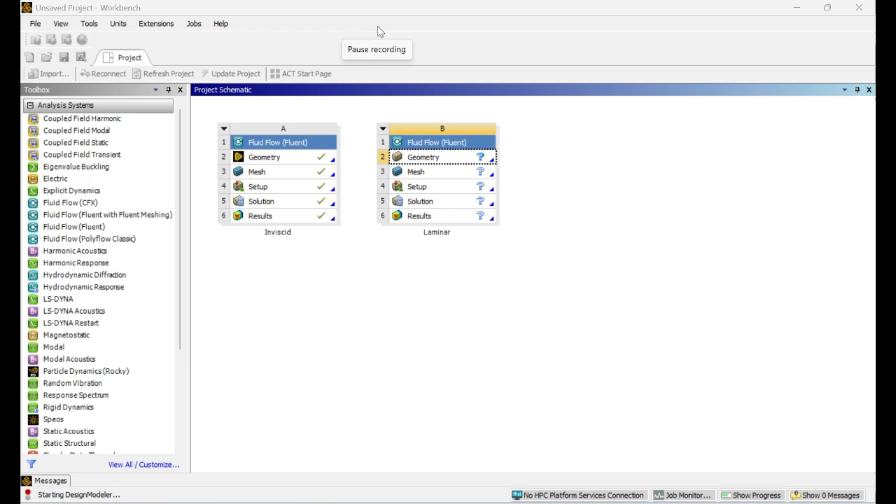Right-clicking on geometry, new DesignModeler. And similar to before, we're going to start sketching. Sketch a circle around the origin. Add some dimensions, in this case a diameter of 1 meter. Draw some lines along the horizontal axis.

Now we're just adding our dimensions. I'm going to change these to 25 meters each. Again, we're going to insert some lines perpendicular to the edges here. Add some dimensions to these, change them to 25 meters, because again, we're going for a rectangle that's 50 by 50 meters.

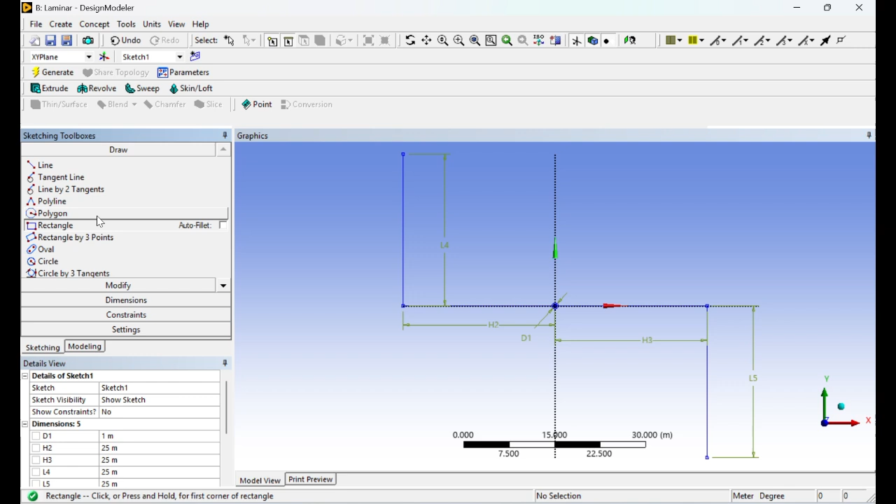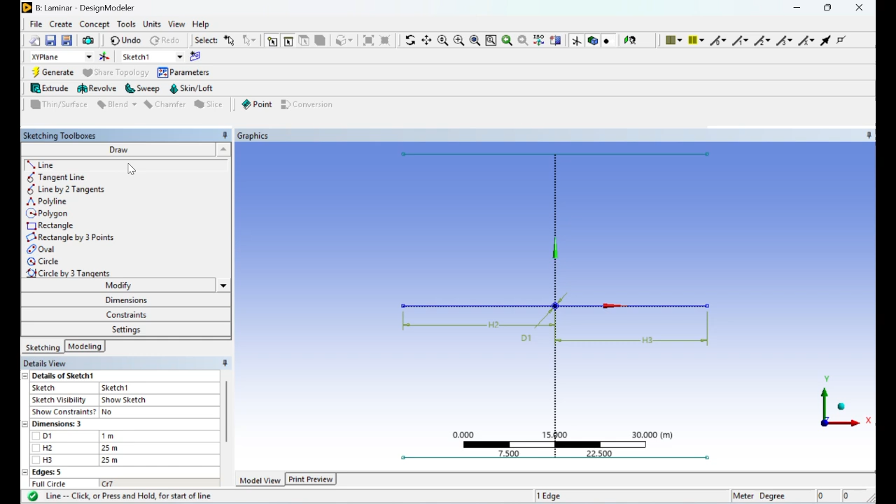Now we can input our rectangle. I'm just going to go in here and clean up some lines really quick. Bring this one back, and this one too. Just delete some of these dimensions and extra lines.

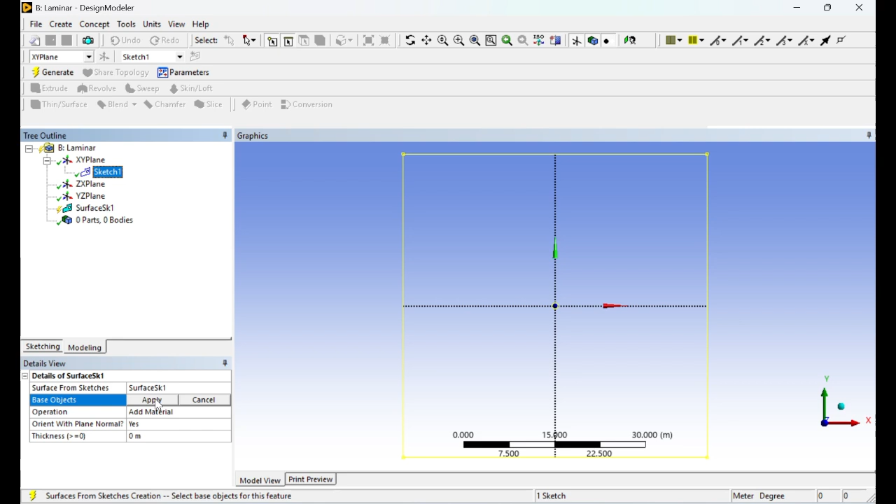And now we're going to go to concepts, surfaces from sketches, and apply. And hit generate, and we've created our sketch plane.

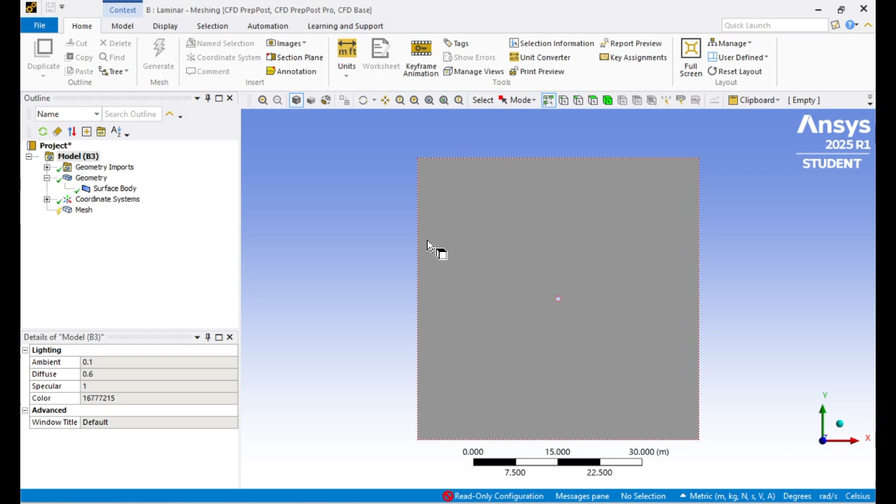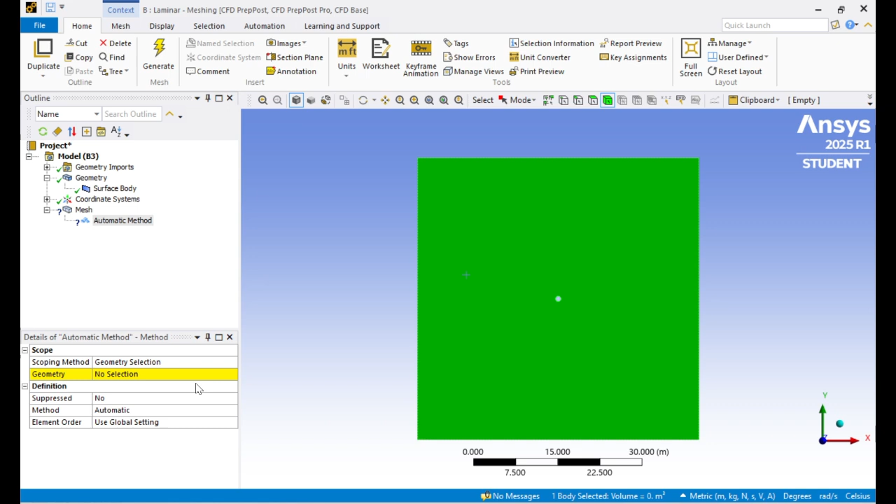All's looking good, so we're going to move on to mesh. Click on mesh. Insert, method, select the face, and then hit apply. I'm going to change this to triangles. Hit generate.

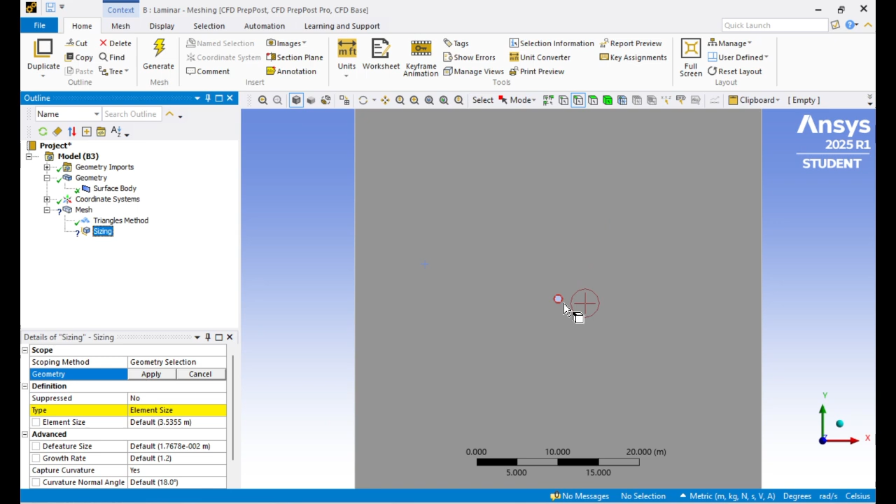And click on mesh, right click, insert, sizing. We're going to pick our edge select tool. Click on the edge of the circle. Change the number of divisions, change that to 250. Select no for capture curvature, and behavior to hard. And hit generate.

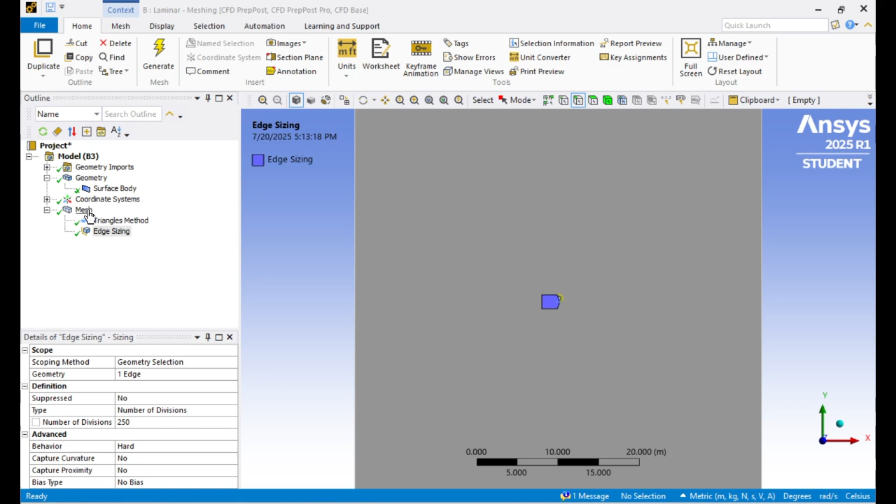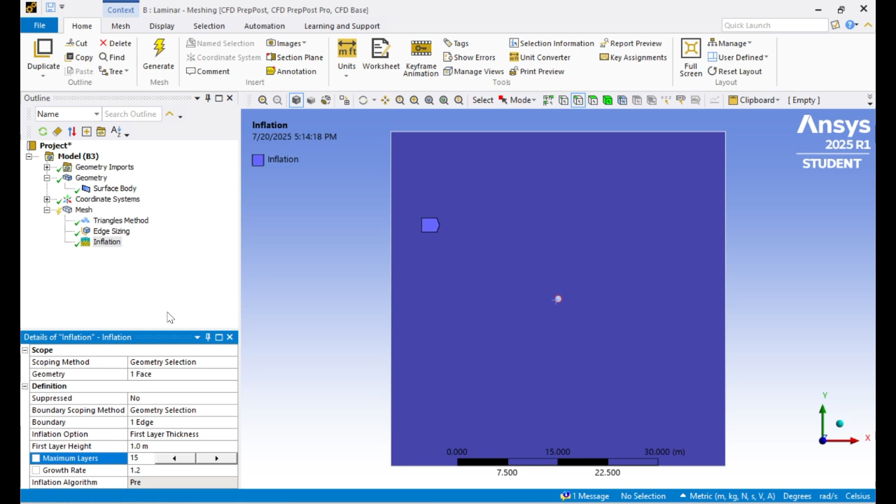And again, we're going to right click on mesh. This is looking pretty good so far. Right click on mesh, insert, and then inflation. First select the face, hit apply, and then select the edge of our circle, hit apply. Change this to first layer thickness, and define it by first layer height at 1, and our maximum layers at 15. And hit generate.

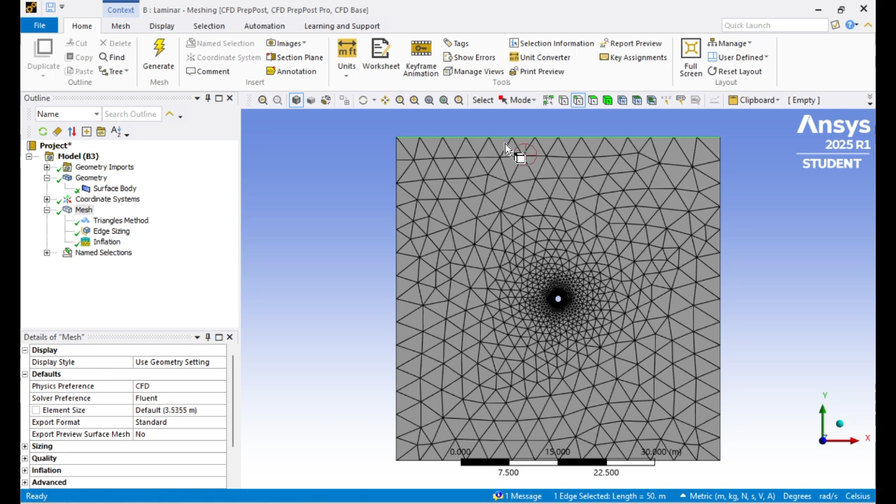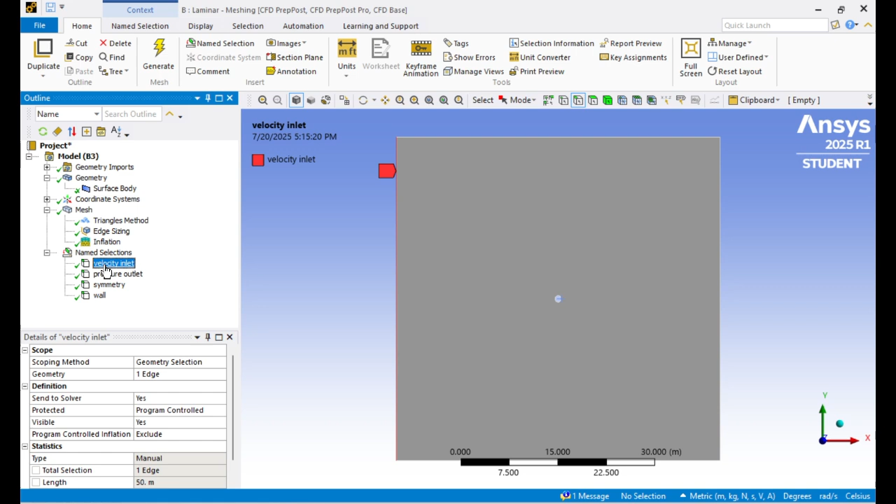It's looking pretty good for our purposes. Now we're just going to name our edges. The left one being the velocity inlet. On the right we have our pressure outlet. Top and bottom edges we're going to label as symmetry. And the edge of our circle we're going to name wall. I'm just going to double check everything, making sure it's appropriately labeled.

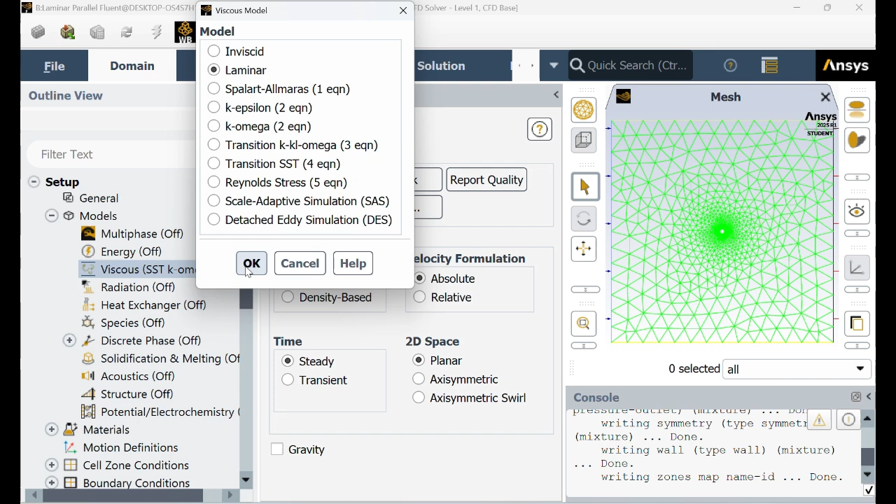Just update this really quick and then we can move on to our setup. Make sure we select double precision. We can hit start. Double check everything in general. Looks good. And then over here we're going to select laminar.

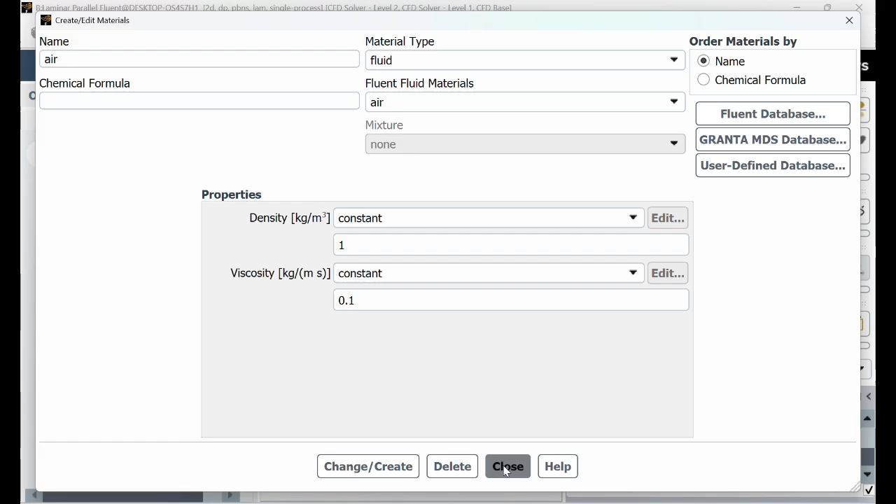Then we got materials, fluid, air. We're going to modify our density to 1 and our viscosity to 0.1. We're just going to double check that our fluid is air, just to make sure.

We can go to our boundary conditions and select inlet, select velocity inlet, and change our velocity to 15 meters per second.

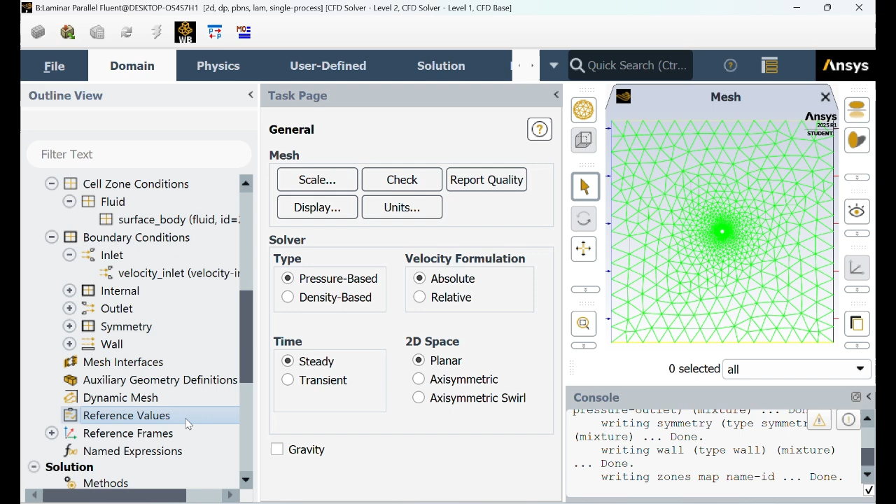We're going to make sure we compute from our inlet. And all our values are updated correctly. This looks good. Check this. Check our residuals really quick.

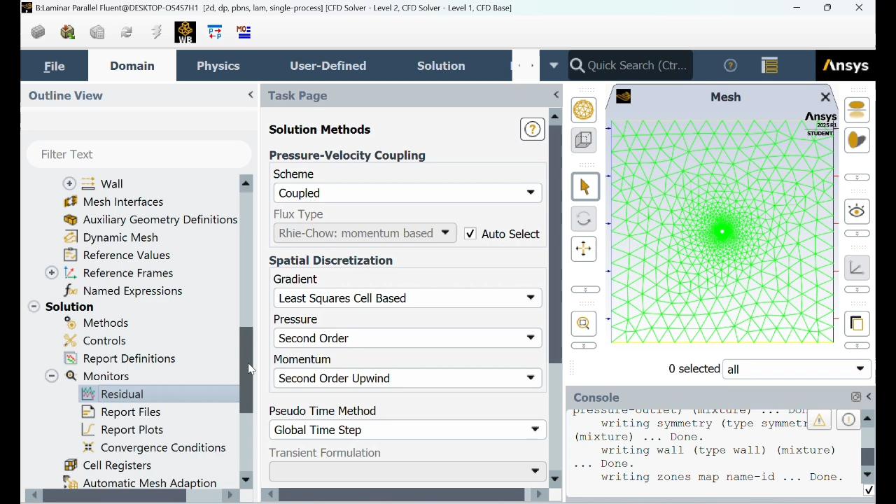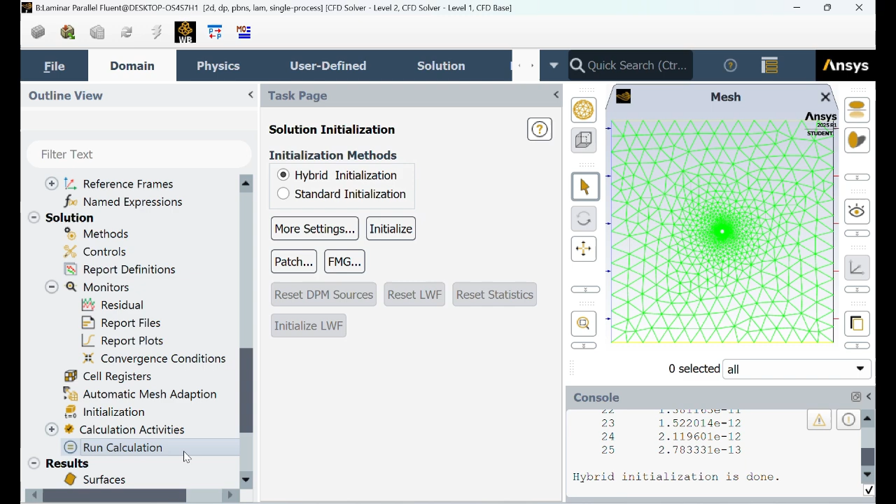And we're going to go to initialize. Change the number of iterations to 25. And apply. And initialize. Change this to 1,000. And then calculate. And the calculation is complete.

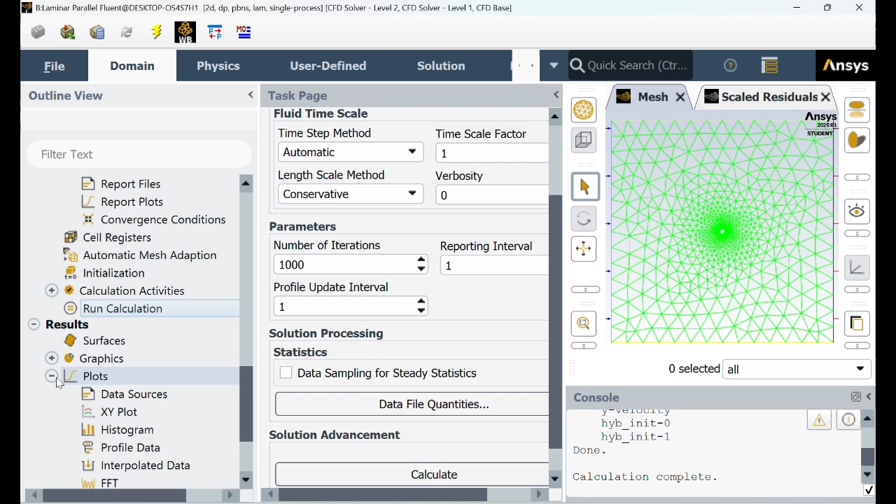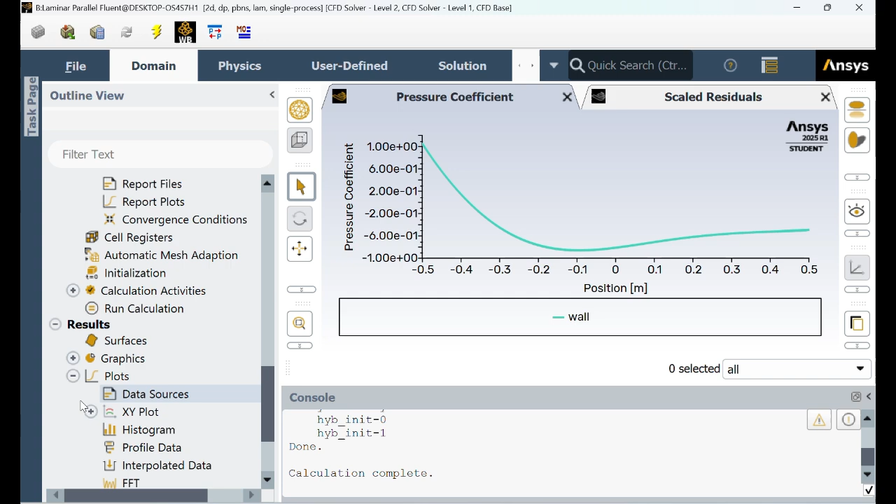Moving over to results, for the XY plot. And we're going to start to compute our pressure coefficient from the surface of the wall. You can see the graph here. This looks good. And we're going to make sure we write this to file.

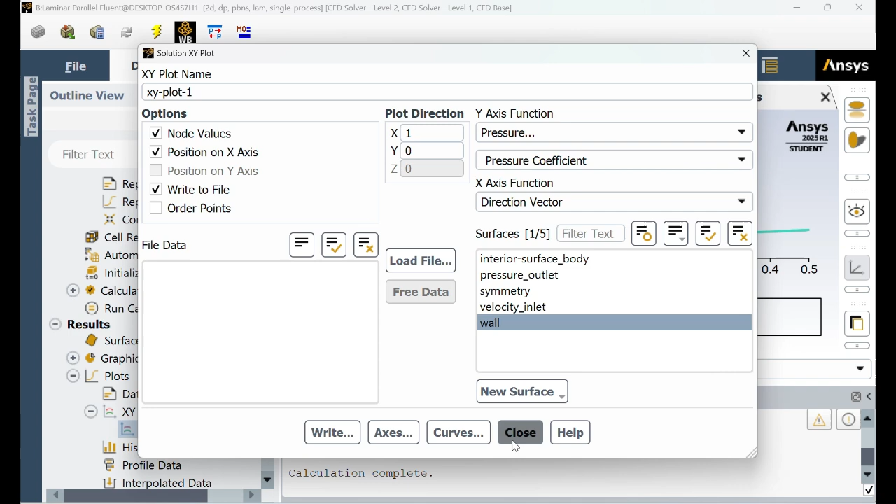We're going to generate another plot, this time velocity, again from the wall. You can see there's no variation in velocity, which is what we want to see. Write this one in the file as well.

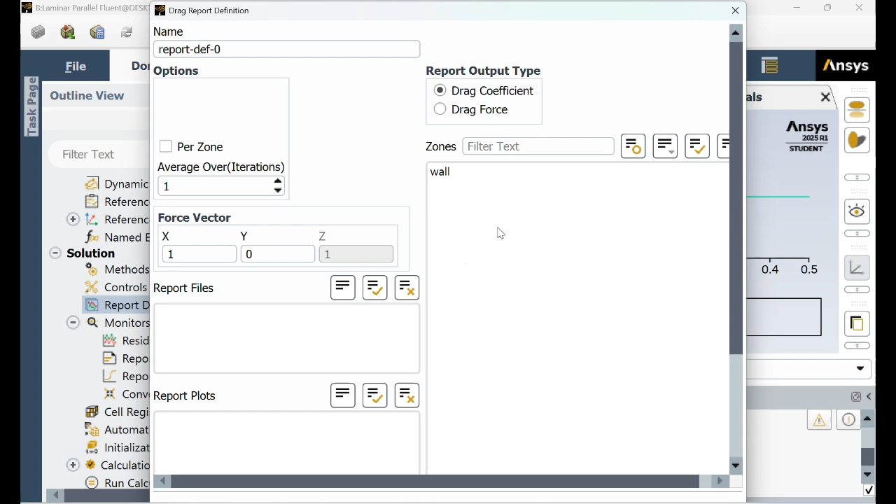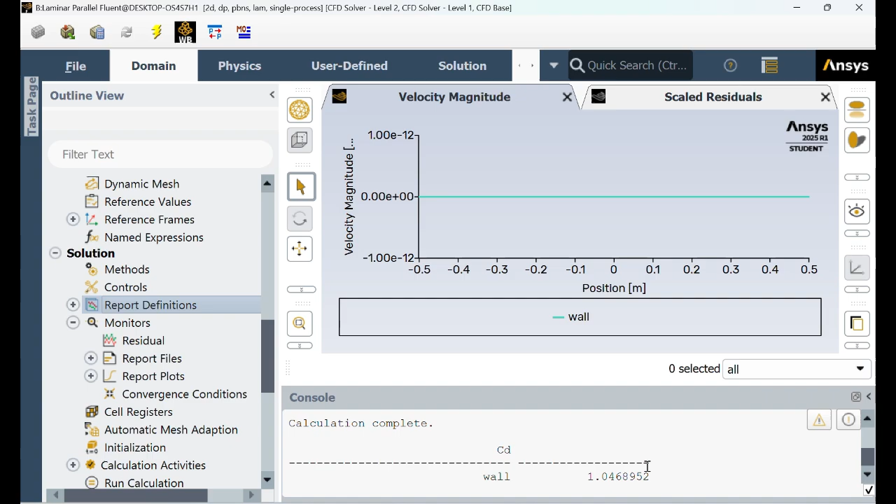We can go to our report definitions and insert a force report. Select drag, zone as the wall, hit compute, and it should write to the console. You can see our drag coefficient right there.

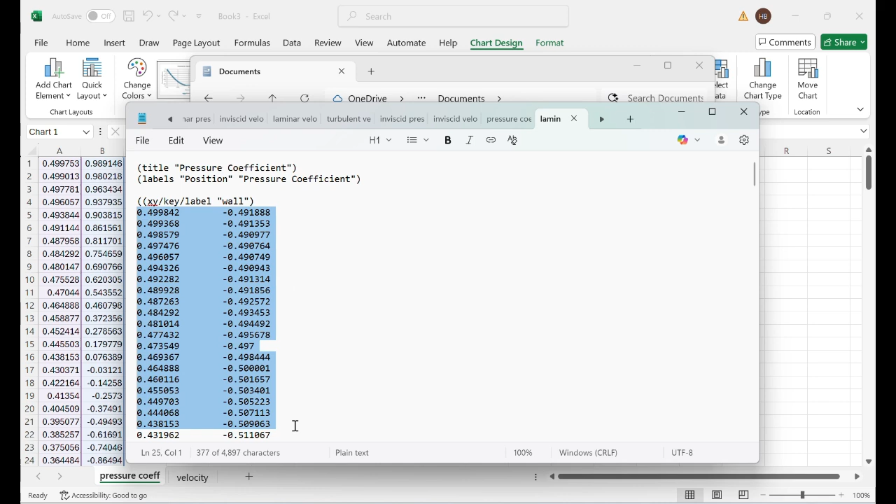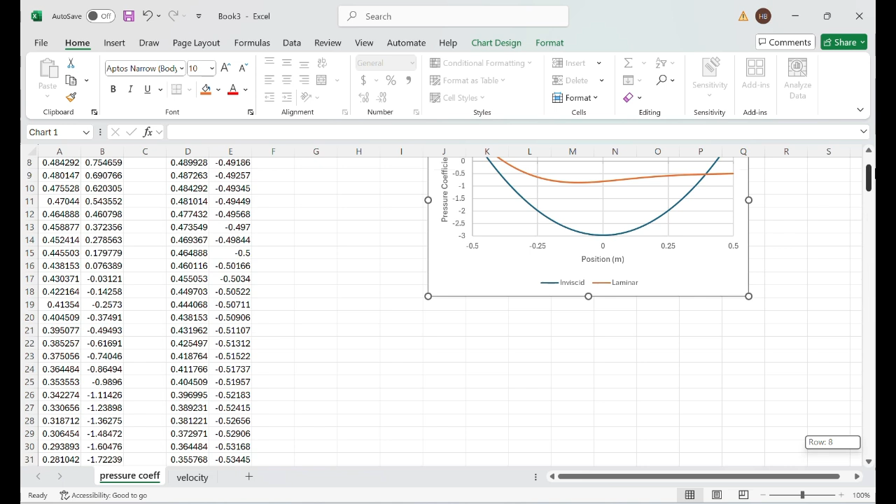And we can copy and paste our data we just got from Ansys. We're going to put this into Excel, a similar process as last time. Select data series, select data, and we're going to add a series. Laminar, so we're going to make sure we select the data correctly. Select our X values. And select our Y values. Now we can see we have our laminar and inviscid overlaid against one another to compare.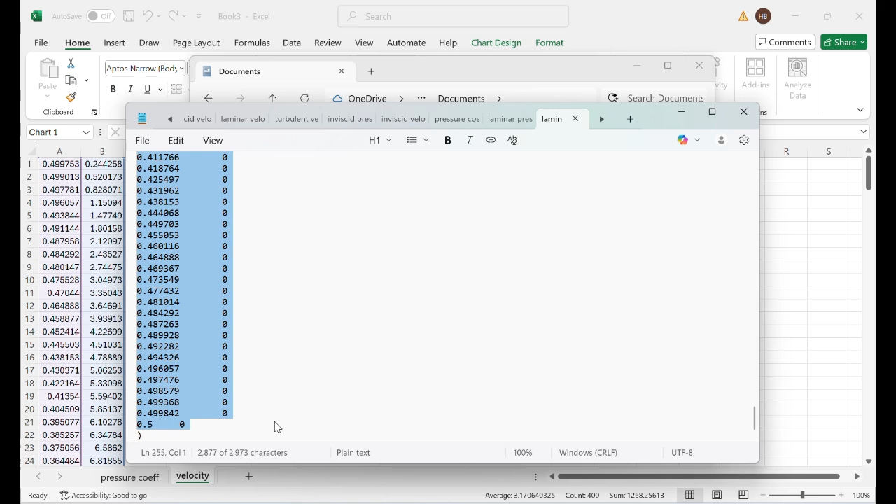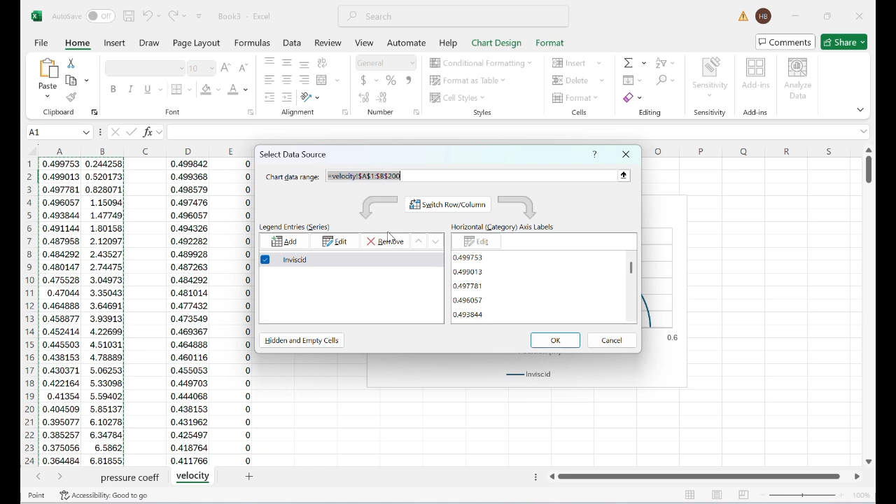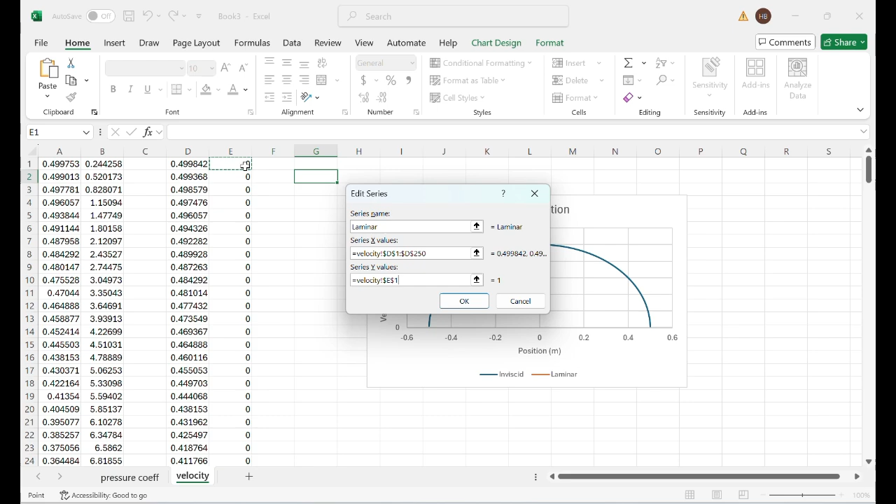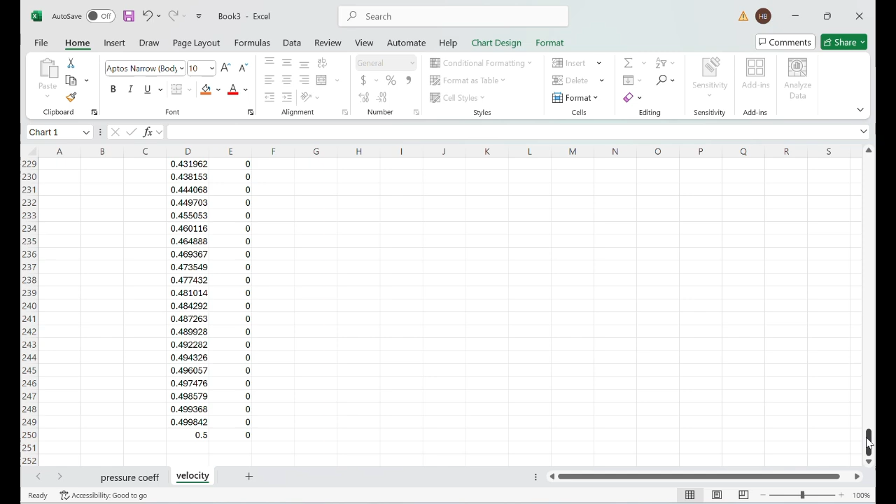And we're going to do the same thing with velocity. Select the file, open it in Notepad, and then select the data. Alright, that's what we want to see.

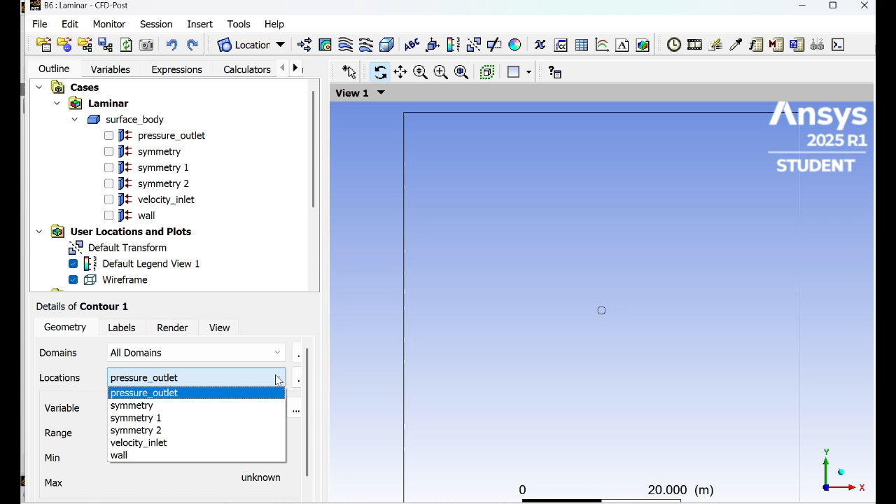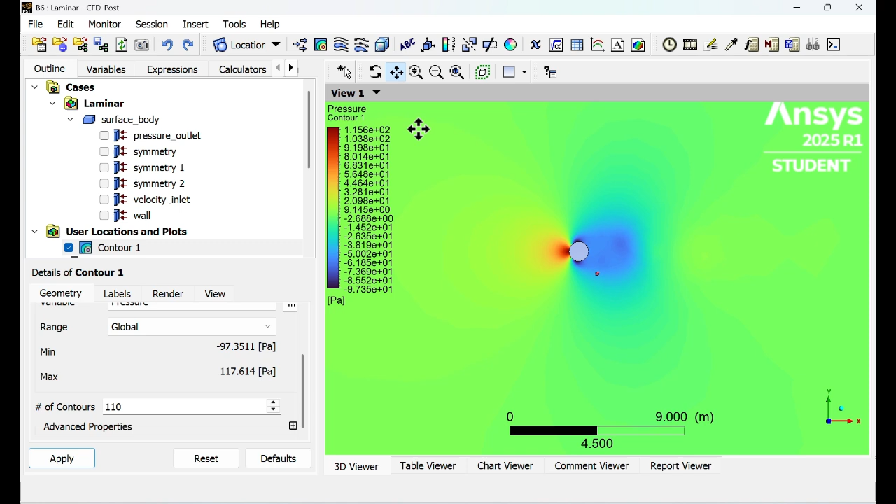Then we can go over to results. We're going to insert a contour. The location of symmetry 2. Change number of contours to 110. And here we have our pressure contour. You can zoom in and see the pressure variation as it passes over the cylinder. You can see our high pressure region and low pressure region.

We're going to apply another contour for velocity. You can see the variation here.

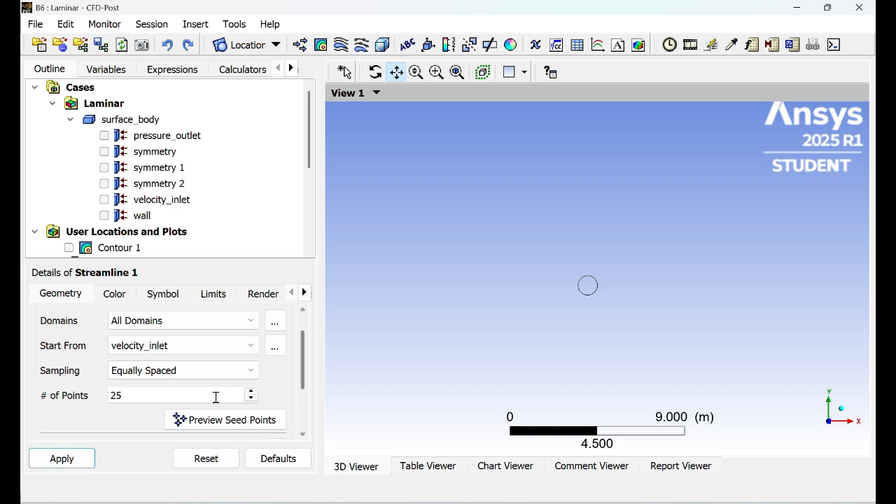And then we're going to insert a streamline. We'll start from velocity inlet. And then change our number of points to 1000. Here we get a pretty good depiction of our streamlines. We have a sizable wake region. And that's going to be all for our laminar flow.